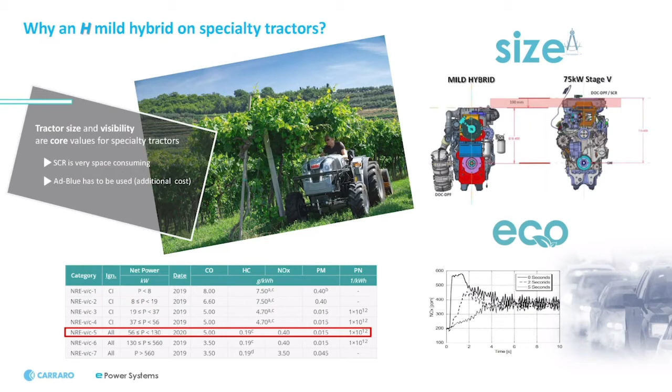First of all, we are talking about an ecologic solution. We are really focused on emission, and as you know, Stage 5 regulation is very severe on emission limits. This is the reason why on combustion engines greater than 55 kilowatts, today it's a must to have an SCR, a really complex after-treatment system that impacts the height from the ground of our tractor. This is the reason why we introduce a downsized engine, 55 kilowatts instead of 75, and we compensate with an electric motor. At the same time, we give really interesting support in the transient phase where emissions are really huge, especially for NOx. So we are saving geometry and size, which is a must for specialty application, and we are also compensating problems related to emission.

Why hard mild hybrid? Everyone knows the concept of mild hybrid coming from automotive. Here we are talking about hard mild hybrid because the contribution coming from the electrified powertrain is really consistent. The tractive effort of the machine, the entire operation of the machine, is heavily supported by the electric motor. This is the reason we are talking about an extended range in terms of power, up to 20 kilowatts. So hard mild hybrid compared to the standard one - you can see in the graph there's a contribution in terms of fuel saving that is really consistent. Today I'll guide you through the results of our field campaign using our tractor.

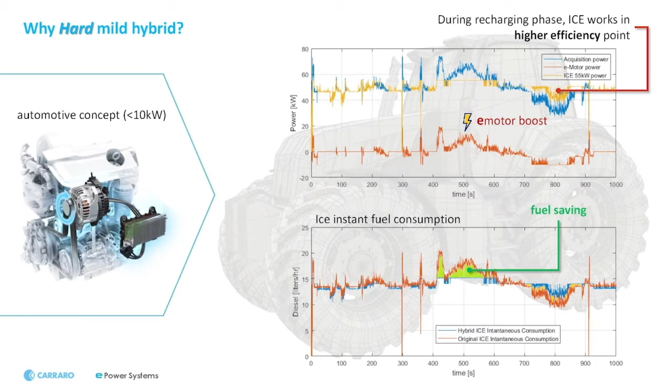Let's have a look at the architecture. As you can see, there's a battery based on nickel metal hydride chemistry in order to avoid any inflammable or explosion situation, that supports the electric motor. The electric motor is connected through a belt with the combustion engine, so the combustion engine and electric motor are always linked together. The electric motor works in both directions, so it gives support to the combustion engine, but it can also recharge the battery during transients where the power is less than 55 kilowatts.

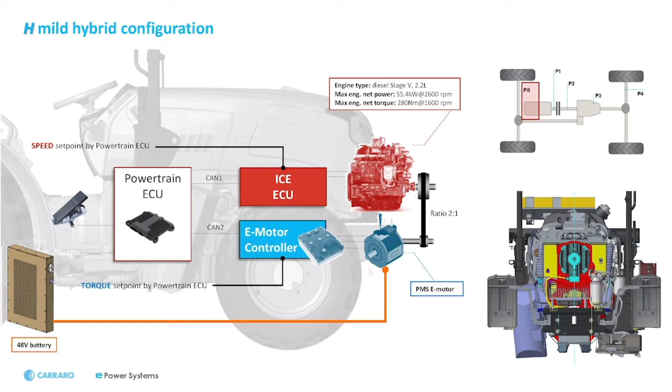We are talking about a P0 architecture, but I would like to give you directly the picture taken from our tractor. Here you can see in the workshop some of the parts installed on the tractor. In the front you will see the permanent magnet electric motor, completely air-cooled to avoid any impact in terms of installation. You can also see in the front the power electronics under the electric motor, and in the back of our tractor the battery, a 1 kilowatt-hour battery. The size of the battery is really linked to the application.

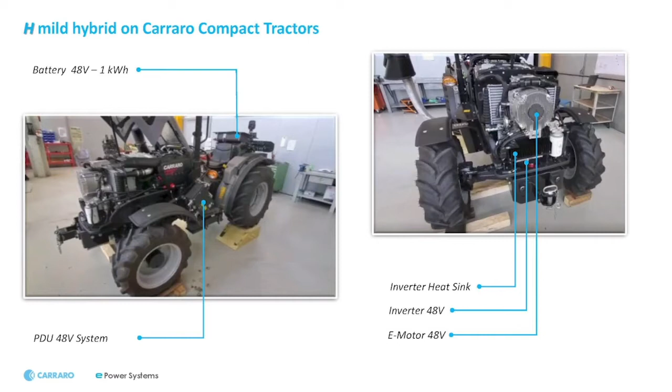As you can see here, the logic, the boost function works this way. As soon as starting from point 1 we start to increase the load for the combustion engine, the risk is that as soon as the load becomes too high, the engine speed will start to decrease. So from number 2 we can reach also number 3, and we have a really consistent engine overload. As soon as we pass a threshold that could be set through the software, the electric motor starts to run in order to support the combustion engine, avoiding the overload, and the speed will come back to the target.

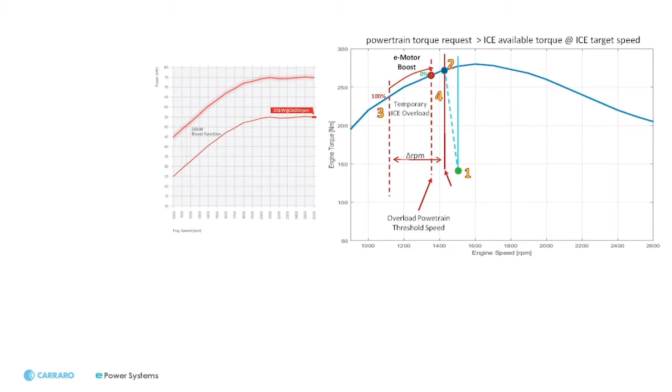I would like to spend a couple of words about the battery. The size of the battery is sized for our application. It takes 2 minutes, for example, to make a complete discharge from 80% state of charge till 20% state of charge, so we have a complete boost function in this scenario, and the time needed to recharge completely is 4 minutes. So starting from 20% state of charge till 80% state of charge, it takes 4 minutes.

We started from our historic data, so we have a lot of data. Data is the base in order to take the right decision, to develop a consistent algorithm. From the data, we start to make a model, a virtual model of each component: electric powertrain, combustion engine, the entire systems together. We start the iteration on the model, and then we move to the bench.

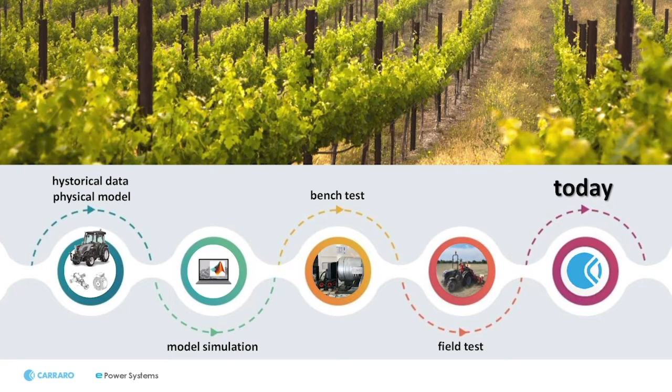With the bench, we are able to characterize the electric motor behavior, the charge and discharge cycle. So we have the entire mild hybrid kit installed on the bench. And then we arrive finally in the field test, where we are able to see if all targets are satisfied.

You can see on the left side of this slide the duty cycle of our application. This is a specialty tractor, so this is the standard duty cycle that we use for this sort of tractor. Today we'll be focused in our testing campaign on the traveling, sprayer and cultivator operation, so heavy operation where the power needed is greater than 55 kilowatts. So we make a focus on the heaviest scenario for our tractor.

We are comparing three vehicles at the same time in the field: our standard compact, that is a 55 kilowatt combustion engine; our hard mild hybrid on a compact tractor, so a 55 kilowatt plus 20 kilowatt coming from the electric motor; and we are also using a 75 kilowatt internal combustion engine to have the complete scenario and a really consistent comparison application.

10,000 hours is the lifetime of our vehicle in this testing campaign. You can see here the percentage, 15%, 25%, applied to the total of 10,000 hours. You will see the number of hours for each of the applications that we are testing.

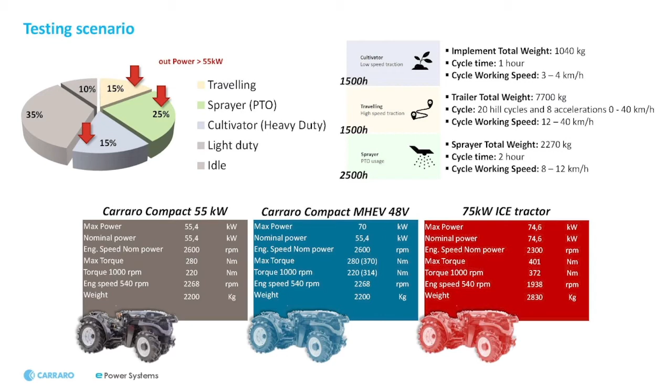Let's talk about the results. You can see here different types of application, static performance. We measure the power of our combustion engine compared to the hard mild hybrid. You see the kilowatts and the performance, which is similar between the pure combustion 75 kilowatt engine and this hard mild hybrid. But then let's focus on the three main applications.

The first one, traveling with a trailer behind. We also inserted a hill in order to simulate mountain application. The time taken to reach the top of the hill is more or less the same if you compare the hard mild hybrid and the combustion engine 75 kilowatt. Obviously, it takes too much time for the pure 55 kilowatt combustion engine.

If we move to sprayers, we measure the average speed along the operation. You can see here that also in this case, the average speed, if we compare the pure combustion 75 kilowatt with our mild hybrid, are exactly the same.

And in the cultivator performance, we also measure the speed. You see there's a benefit in terms of vehicle average speed because our mild hybrid increases the vehicle speed by 6.9% during this sort of operation.

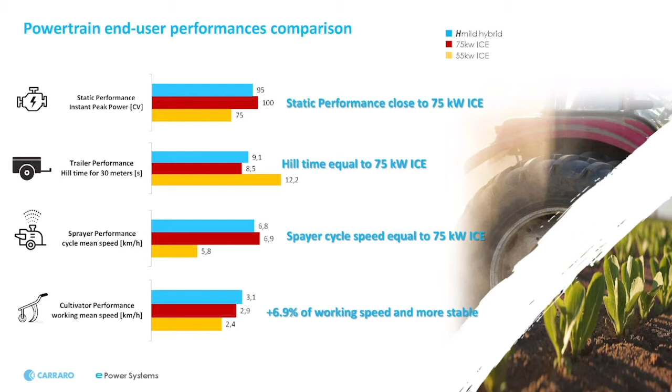Let's make some focus, not just measuring the pure performance in terms of numbers, we want to highlight some facts. The first one: using our hard mild hybrid, the vehicle speed is really constant. You can see here that in the first diagram, the blue one, the speed is really constant compared to the other scenario. And there's a benefit, for example, in terms of comfort from the driver perspective, because the speed is constant, the comfort is very good inside the cab.

Also, if we look at the hill performance, you can see that the time taken from our tractor compared to the 75 kilowatt is the same to reach the top of the hill, but the reaction, the readiness of our tractor is higher. So in the first meters, the reaction and readiness of our hard mild hybrid is higher, the blue line, compared to the other two vehicles.

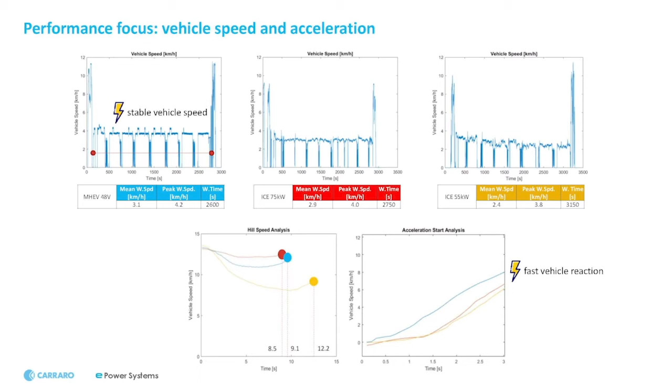We made also a simulation on a sort of infinite hill, starting from a state of charge of 85% till a 20% state of charge, so a complete boost function: how long can we travel at speed? We are able to cover 422 meters at speed with an inclination higher than 28%. So it's really a huge application that we are able to cover with a complete boost function of our hard mild hybrid.

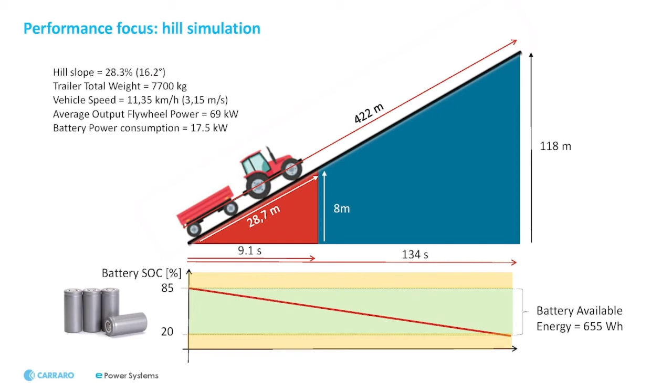Let's talk also about fuel saving.

Fuel saving is one of the key topics of our application. You can see in this table a lot of numbers. We measured all the liters consumed in the application, refilling completely 100% the fuel tank and measuring the consumed fuel. So we are not talking about simulation or electronic data, this is the real fuel used from the vehicles in all the application.

We are just considering the three heaviest applications: traveling, sprayer, and cultivator. We consider the impact neutral in other operations like idle or light duty, but we know there's a benefit anyway, so we are more conservative in this case.

We also have to keep in mind that by avoiding the introduction of the SCR, we won't use AdBlue. So the total fuel saving, diesel plus AdBlue, will lead to a saving close to 19%.

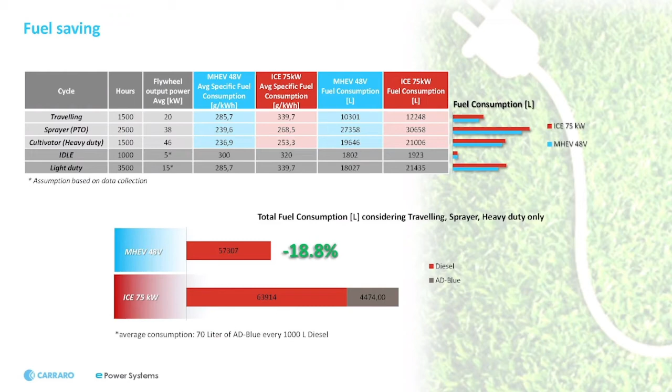It's a big number that, if we also consider the cost of the entire powertrain, comparing the pure 75 kilowatt engine with our mild hybrid, this saving in terms of fuel and AdBlue will compensate the extra cost of installing all the electric and electronic devices for our mild hybrid.

So we are talking about a solution that, also from an economic point of view, is absolutely sustainable, because we are avoiding installing the SCR, which adds cost. We are increasing cost because we use a battery and power electronics, but at the same time, over the entire life of the vehicle, we are able to recoup the extra money used to install the mild hybrid kit.

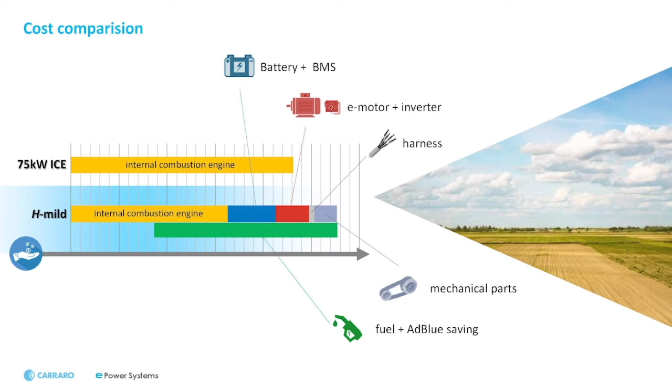First of all, there's a cost-neutral application. For the first time, we are talking about an electric application that is also really interesting from an economic perspective. This is the first point, because our mild hybrid will help OEMs make a jump into electrification in a really moderate and sustainable way.

Second point: we are able to use this mild hybrid kit solution with any combustion engine. There's no impact on the combustion engine side in terms of thermal behavior or electronic interface. We run in parallel together with the combustion engine, and we are able to switch to any type of engine. Obviously we used our 3-cylinder because it's a really compact application, and there's a benefit because we are downsizing the engine from a 4-cylinder 75 kilowatt to a 3-cylinder 55 kilowatt.

Total system efficiency will be increased by 3%. It's an interesting value with this kind of architecture that is very simple and neutral in terms of installation on the tractor. And there's also a big benefit in terms of cost saving for fuel and AdBlue, because as already said, we are close to 19%.

Carbon footprint is very important for us and for our sustainable roadmap. With this kind of solution, we are able to save 10.3% in terms of CO2 reduction over the entire life of our tractor. And also from a maintenance point of view, the effort is comparable to a 75 kilowatt engine.